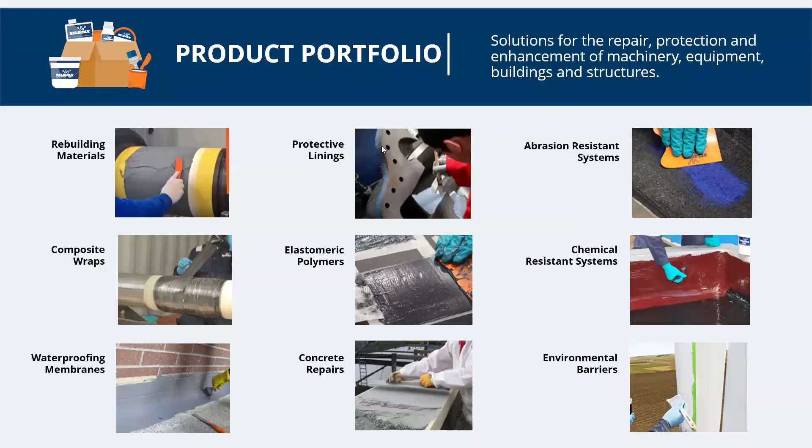So we have a lot of products, and we know you guys have a lot of problems. Hopefully not, but there's a lot of things that happen in the field. You have a lot to do in your job. You're trying to keep a plant running at capacity, trying to meet your yields, but then you've got issues like corrosion, erosion, stress corrosion cracking, chemical attack, upsets, all types of things can happen. So we have a lot of products, you guys might have a lot of issues, so you might not have time to match every single problem and circumstance to the correct Belzona product.

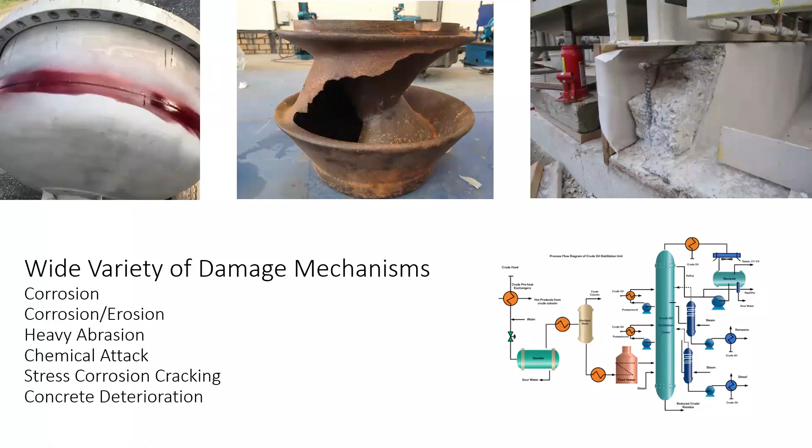That's where our consultant support comes in. We have about 10 local consultants matched up to each specific plant. We have consultants for anywhere from refineries to hospitals, anywhere you could put Belzona, which is just about everywhere. They can come in, look at your problem, diagnose it, and figure out what product or solution needs to take place. That takes a lot off your plate as far as time or needing to go research something. You just show us the problem you're having, and we'll come out there, take a look at it in person if possible, and find out if we can help you and how.

So we'll be the communication pathway between you guys and the contractor and all the different teams you have. You might have three different teams working on one problem. Our guy can be the person to communicate with all of them, make sure he figures out what we need to do.

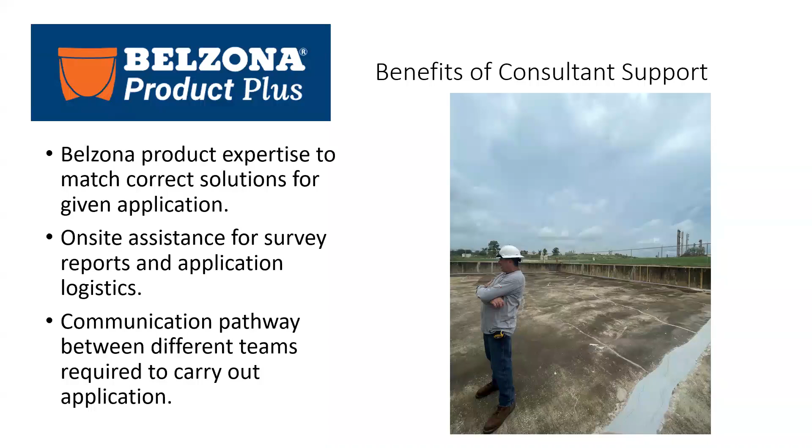Once that happens, normally the next step is it goes to engineering, especially for involved projects. Our local consultants are going to work with me - I'm one of the in-house engineers, and we also have Devin and Ethan, so two more here in-house, and some managers at the office as well that can help out. Once the consultant gathers all the information, he'll bring it to us. We'll make sure that what he's come up with is the best possible solution. There's a lot of different ways to do these applications at times, so it'll be a little bit of back and forth with our consultants and engineering to find the most practical, efficient, and robust procedure possible.

And then we'll draw it up. Especially if it's something out of the box like these three applications, we're going to draw it up step by step with 3D drawing software. That way your team can see the repair, what we're trying to do, understand it better, and typically, the better you plan, the better the project is executed.

For example, here you have a scenario where you have a sump that's leaking. It's a fairly involved application - you have both steel and concrete, and you've got leaks coming out of areas where you don't really know where it's leaking.

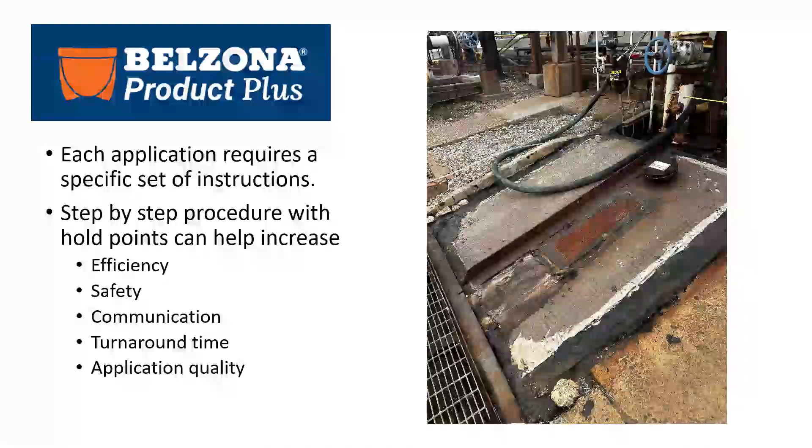You got a repair that's on there that you're not sure, once you take it off, how bad it is. Just an old sump, so there's limited information on it. So it's really helpful to do a full 3D sketch step by step and also put in some hold points and what could possibly happen here and what we should do if this happens. We were able to communicate this with their team, have a little training, and then this was installed to seal this area off.

So the procedures are just going to increase your efficiency. You try to think of everything that can happen in the field so that there's no big surprises. Safety is another thing. Typically, when we're writing these procedures and going step by step, that's what gives us time to think about, okay, this might happen here, especially for leak seals. If this happens, this is something we got to consider.

And this is a good way for your team to communicate. So instead of having to talk to someone on the phone and explain to them what Belzona is about to do, you can just send them this package. Hey, this is what Belzona is going to do, and they can have a really good understanding of what we're going to do and how we're going to do it.

And typically, when you plan out better, usually the installation happens more efficiently with a better turnaround time, and the quality also improves as well.

So you got your consultant helping you out, taking a little time off your plate because he could just go to the field, get with operations, go look at the asset that has issues, relay it to us. We'll send you the procedure.

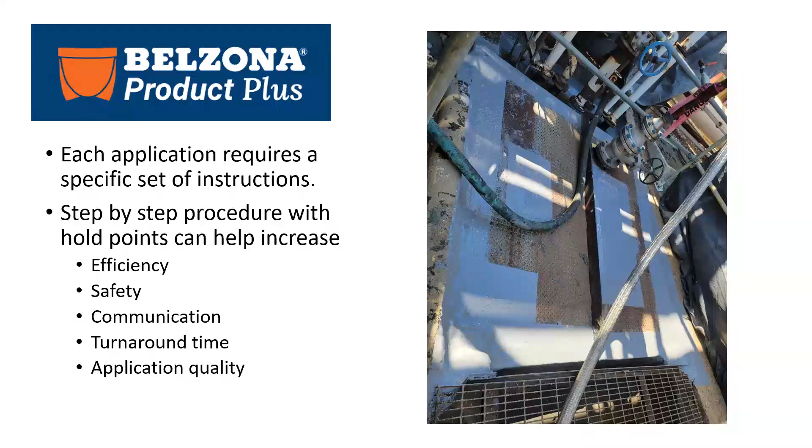The next thing is, you got to have some Belzona product to put it on. The good thing is we have a local inventory. We keep it stocked, to more than a year's worth of supply. So we're constantly re-upping, making sure that we have enough.

So it's not something like you need this now and we have to bring it in from the manufacturer in Miami, which could take 3 to 4 days, or it might cost extra because we got to next day air it. For the most part, we're going to stock all the regular products, all the emergency grade products, which are usually the ones that you need right now. Something like the leak sealing product, the composite wraps. Those are usually the ones that you need now, and we keep a hefty stock of that.

We also have a lot of liners in stock, unless we're talking about coating a 3,000 square foot vessel. We should have that in stock, and we probably have that too. Typically, those are a little bit more planned out, but you never know. We do have quite a bit of material.

It's here in our shop in Alvin, so we're pretty close, and that's part of the Belzona product plus - you got to have a substantial stock so that you're a stocking distributor, so people can get it in a hurry. So now you know what product you're using and you know where you're going to get it.

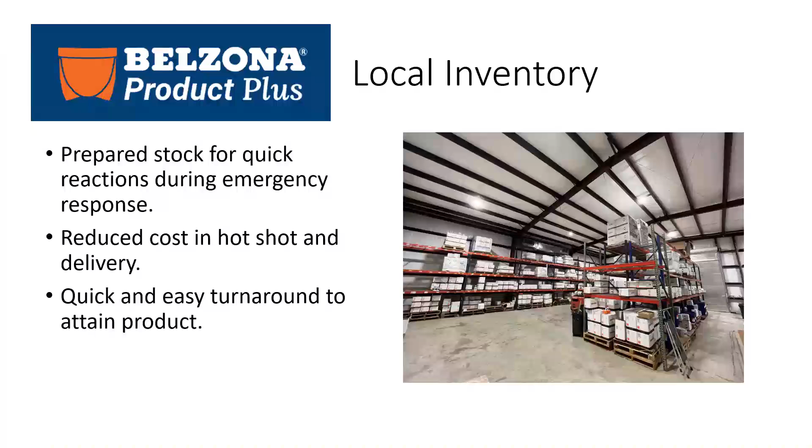The next question is, how are you going to put it on? There's several ways you can do this, and each client has a different way they get it done. Some like to use their own contractors, which is fine.

We do offer training on any one of our products, so we can do training on composite wraps, leak training, liner training. We do it here in our shop in Alvin. We can also come to your plant and do the training there. And we can even do mock-ups. If it's a weird application, we can make a mock-up so they understand what they're doing.

So Belzona is pretty simple, but it's always good to get your hands dirty before you don't want the first time you're mixing a product to be on the actual application. So we make sure that we run through the application, we talk about how to mix, what kind of climatic conditions you need, what kind of QA QC needs to be done, and then we actually do it hands-on. This picture right here is our ASME engineered composite wrap training.

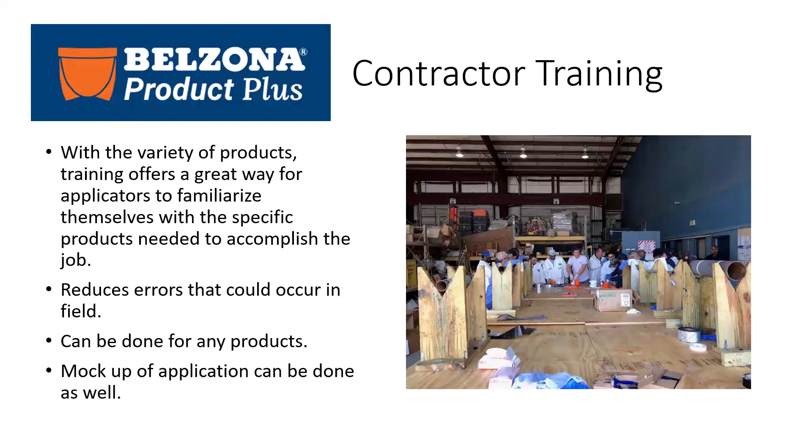So let's say you got your team trained, but it's their first time using Belzona. We can also offer supervision of the installation. Let's say you trained a group of four people. They're going to install this wrap on this water line here. This is a pretty complicated wrap. This isn't just a straight pipe - you got a lot of changes in geometry, you're patching, you're wrapping.

This is a pretty involved wrap. So we do have supervisors that can come on site. Our consultants can also check in, but we also offer an experienced person who installs these on a daily basis and can work with your team on their first few applications, just to get the ball rolling. You can do all the training in the world, but doing it in the field is where you learn the most. If you have a person who's been doing this in the field for several years, they've seen more things that can happen, and like with anything in life, the more experience the better. So it's always good to have someone there to watch the first couple, take them through the process, and make sure it goes right.

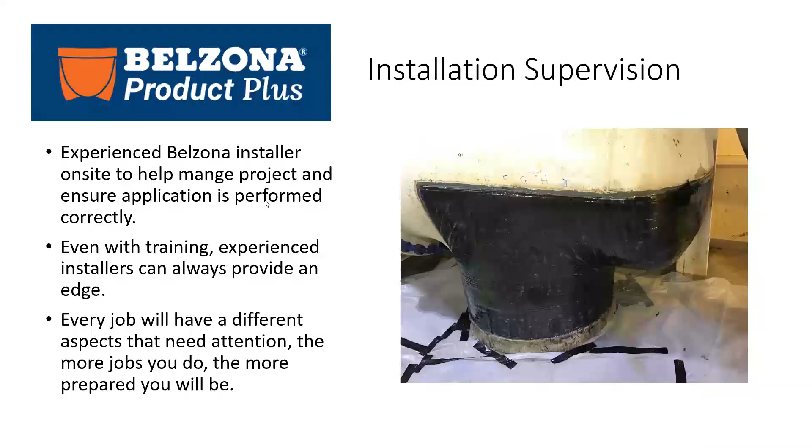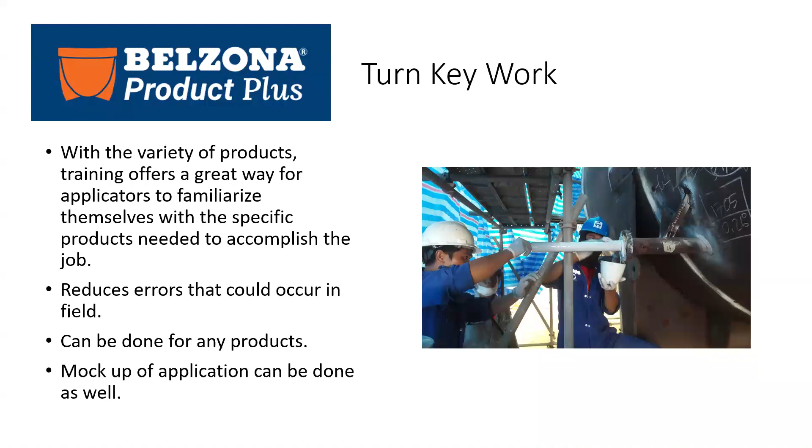That's a second way you can do it. You can have your contractors trained, but also add in an experienced Belzona supervisor, so we do offer that. The third way is you can go full turnkey. We offer a turnkey service, so a consultant comes out, figures out what product needs to be put on, engineers write up the scope of work, and then our in-house team comes in and installs it. So we can do everything from inspection to turnkey.

Speaking of inspection, we also offer that. Whether it's our team or another team, we can come in and do the inspection. We can meet you there for the hold points - anything from pre-surface preparation, salt concentration, surface preparation, cleanliness level, first coat inspection, final coat inspection. Coatings require a lot of different hold points, and if you're not used to them, you won't really know what to do, which might make a job run longer than usual. But we can work with your inspectors - we work with third-party inspectors all the time - to make sure everything runs smooth and the coating is put on correctly.

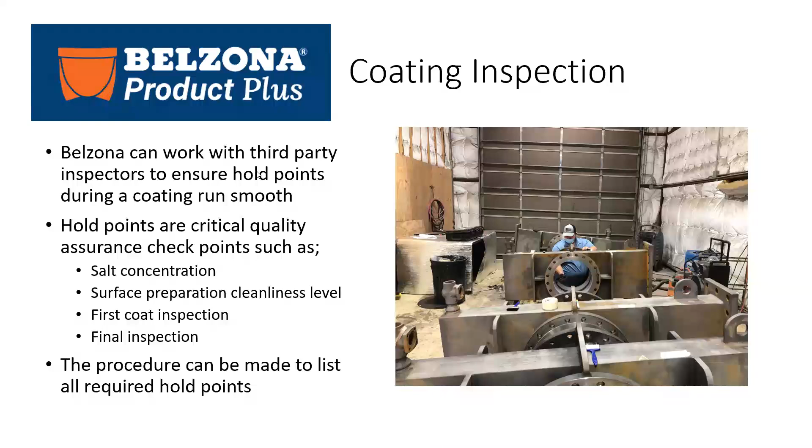Finally, when you put this all together, it's what we call our planned reaction program. We get with your team, you meet our consultant, and we talk about our solutions and how we can use them in your plant. Maybe you're having a CUI issue and you're on a CUI campaign, so you're going to have a lot of repairs over the next year, or you have a lot of leaking pipes, or you have three turnarounds this year and you're going to be coating this and that.

We can figure out what kind of training you need. Do you need a turnkey service? Do we need to get an MSA set up with our turnkey team? Are you going to go the supervision route? Do you want to have a stock of product? Maybe you have some big projects coming up and you just want to hold stock, so you can do that as well. That's basically the plan reaction program.

Every company is a little different, and some are going to use it differently. We have some that order this much composite wrap material every year. They have 200 people trained every year, and they make sure they always have material ready for a surprise leak like the one you're looking at right here, so they're always ready to react as fast as possible.

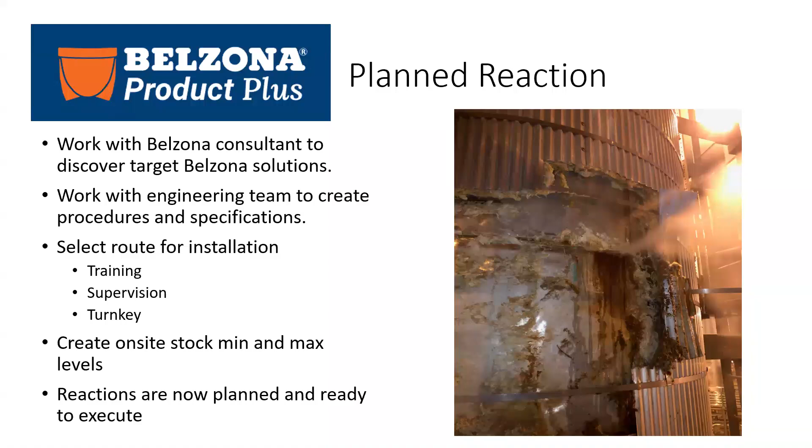So that's just a little introduction into Belzona Product Plus. It's not just the product, it's a little bit more.

We have a lot of different solutions. If you're looking at tanks, we can do anything from internal to external coating. We can install new equipment with plate bonding, fix leaks with composite repairs, and seal the tank base with tank base sealing. These are all problems everybody has, so we have a lot of different solutions. For tanks, we'd like to get with your tank team, figure out what problems you're having, what solutions will work for you, and come up with procedures - like a chart that makes everything simple, especially during a turnaround.

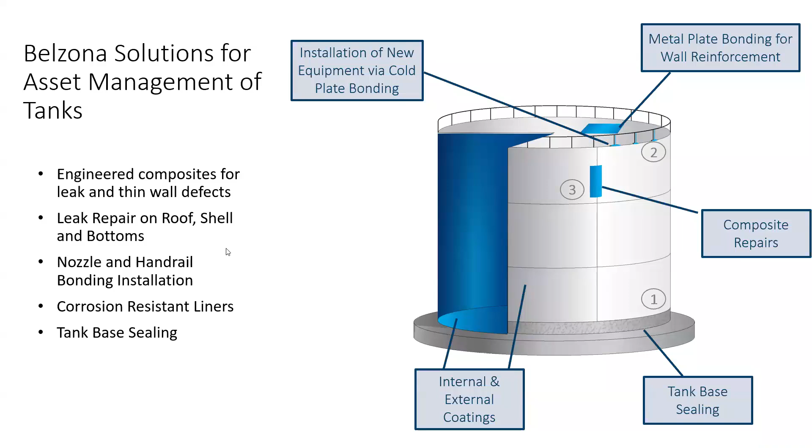We also do coatings and liners. So if you're a rotating equipment engineer constantly dealing with pumps, you might want to know what type of coatings we typically use on pumps. With different operating conditions and different chemicals you're pumping, we can pick different products and make sure we're in your specifications.

So if a pump does come out of service for some reason, or you're in a turnaround, we have an option to line it and it's already known, and we don't have to put it through the MOC process or get it spec'd in. So it's just, especially for vessels and heat exchangers, it always just works quicker when it's specified in there. And it's also just better because let's say you have weird chemicals that you're dealing with. If we get ahead of time, maybe we can do some sample testing, figure out what product is correct. We do test a lot of different chemicals and operating parameters, but you might have one that we just don't have testing on. And we might think we have a product that works, but if we're ahead of the game, we can do testing and know that it works.

So if you have a vessel coming into a turnaround in 2 years, you can send us the data now. We can figure, okay, we have this product and it has the perfect testing, or no, we think this is going to work, but we should do a test coupon to make sure it's going to work. So it's always good to just get ahead. There's a lot of different situations that occur in the field as far as chemicals, temperatures. So it's to have the quality assurance. It's just a lot better to plan ahead.

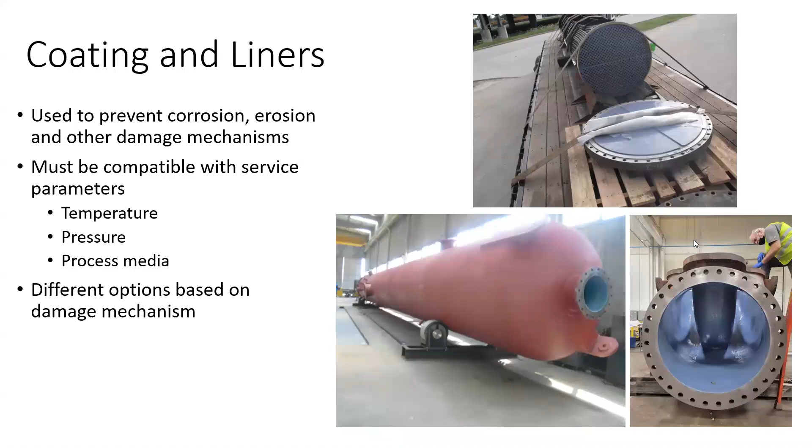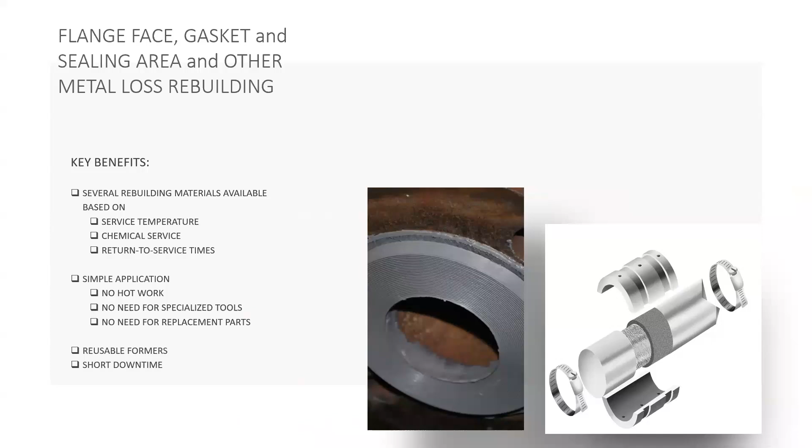And like I said, we have a lot of different solutions. So anywhere from your composites to your coatings and liners to your tank work, but we also do sealing areas. Something as simple as you have a manway that's pitted and it's not sealing correctly, we can rebuild that manway and have a correct sealing surface.

If you have 50 flanges that need rebuilding, that's something that we might want to get into the plan reaction. That seems like a problem that's reoccurring. So let's figure out what procedure we can use, what product we can use, what's the most efficient way we can fix this, have it in stock, have the people trained, and now next time you're opening up the flanges, let's fix them. And then the next time you open them up, they'll be good to go because we no longer have that metallic flange face. We have a non-metallic gasket. We're not going to have that crevice corrosion.

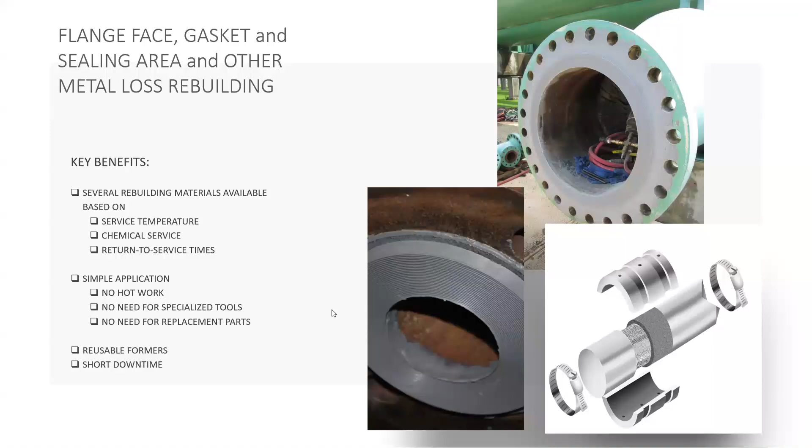So that's the type of things that we can do, is just get ahead of the game with our extensive portfolio line and our consulting. We can take anything from steel to concrete, like you're looking at here. Any problem you have, we could have a solution, and we could have a planned reaction so that we're ahead of the game when it comes to your next turnaround or your next emergency.

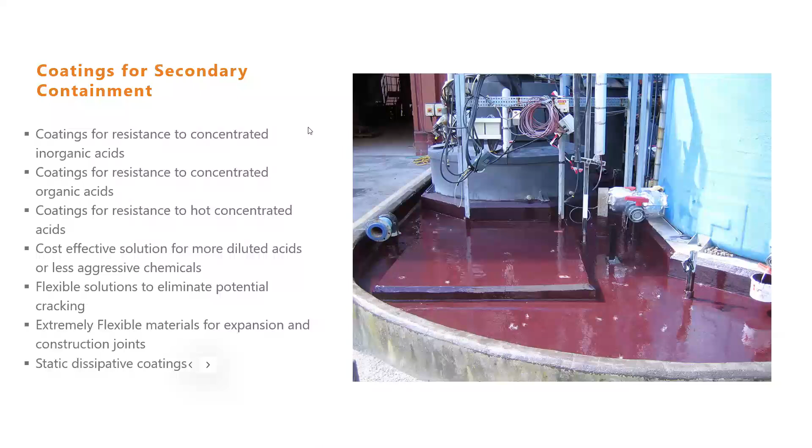So your next emergency could be $100,000, $200,000 less if you can solve it 1 or 2 days quicker. So that's our main goal, is to save money, help the plant run more efficiently, and have less downtime. I mean that's definitely our motto.

So that's what the Belzona Product Plus is all about. And we've been doing this for 20 plus years. Our consultants, many of them have 15 plus years of experience, so they know what they're doing. And then our engineering team, we just get, in Houston, there's just so many applications, so many different plants that we get a lot of reps in. So whatever you have, we've probably seen it before, and we're ready to roll at a moment's notice.